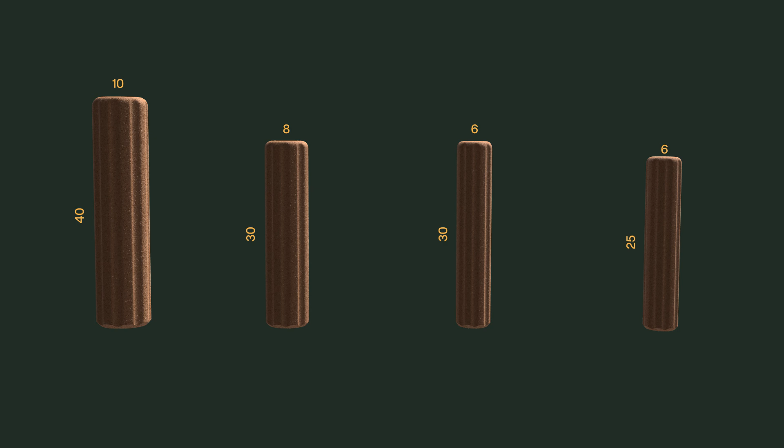In this video, I will demonstrate how to create a smart hardware type component that uses Autodesk Fusion configurations together with JoinerCAD Smart Hardware features. For simplicity, we will use a basic component, a dowel pin. Its dimensions will be controlled using configurations, and for placement, we will use the template provided with the JoinerCAD installation.

It is important to note that configuration-based hardware is created in a single file and then inserted into another file that controls the placement logic of the component. I will start by creating the dowel pin. Since this component will be controlled using configurations, the first step is to create the parameters that will drive those configurations. I open the parameters dialog and define values for the dowel's length and diameter.

I also add two additional parameters, L1 and L2. These parameters define how the dowel length extends in each direction within the joint. They are not required for a functional component and are used here purely for learning and demonstration purposes.

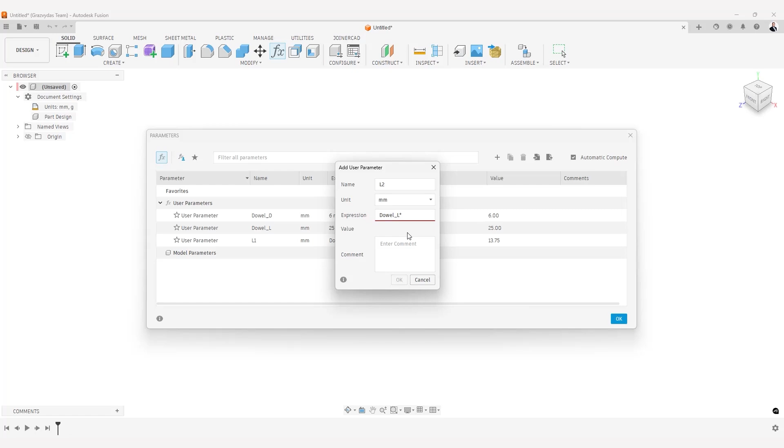Next, I create the dowel geometry. It is important to understand that this file will contain not only the dowel itself, but also the geometry of the hole that will be used for cutting. I model the dowel so that its shape and proportions are as close as possible to a real-world component.

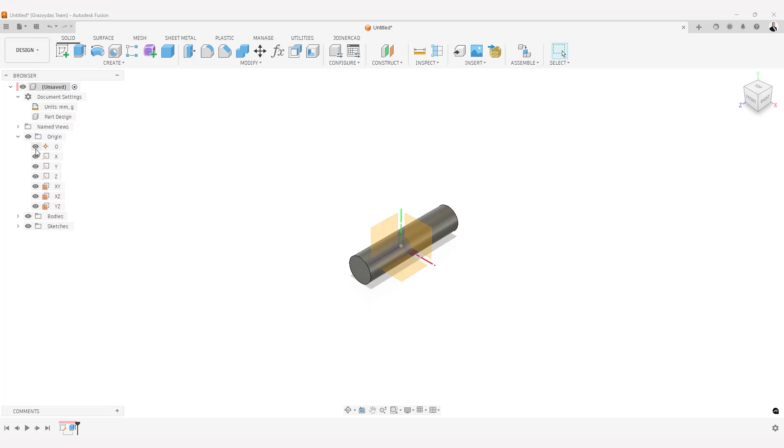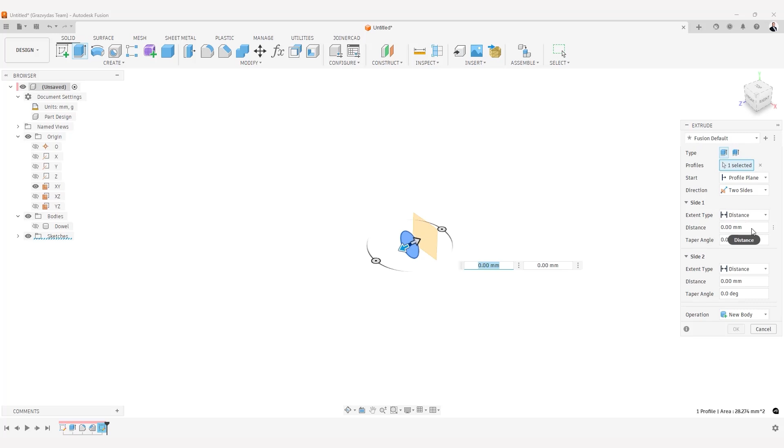Now, I create a new solid body that will be used to cut the holes in the panels. This geometry is created on the same XY plane and uses the same parameters as the dowel itself. However, I add an extra 5 mm so that the hole in one of the panels will be slightly deeper. Please note that when using the extrude command, I select the operation type New Body, which creates a separate solid body.

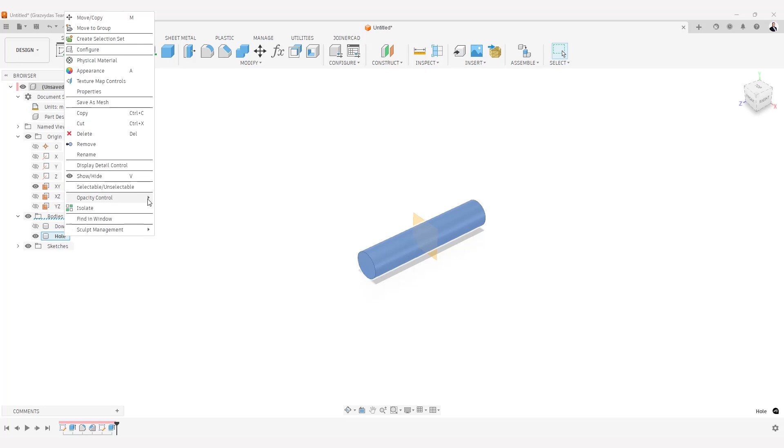For better visual clarity, I adjust the transparency of the bodies and apply a pine appearance. As mentioned earlier, I now set the sculpt type for each solid body. The dowel itself is set to neutral, so it will be ignored during the sculpt operation and will not be affected. The hole body is set to subtractive, meaning it will be used to cut material.

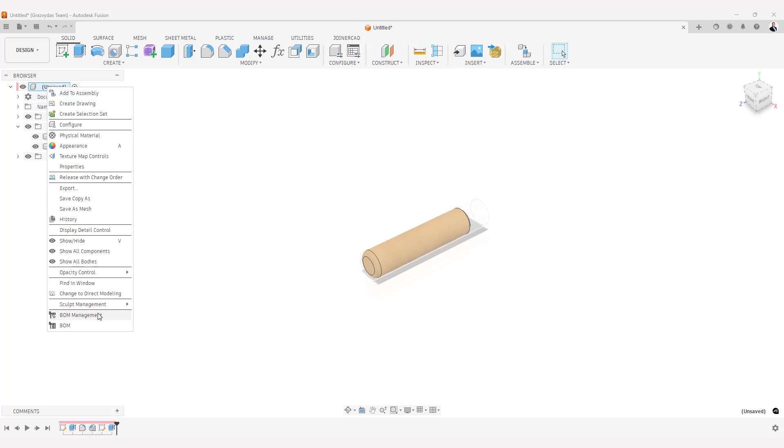I change the root component BOM type to quantitative so that the dowel is properly counted in the BOM. After that, I save the file. Next, I create the configurations that will allow the dowel dimensions to change. I open the display configuration table and define 4 different configurations.

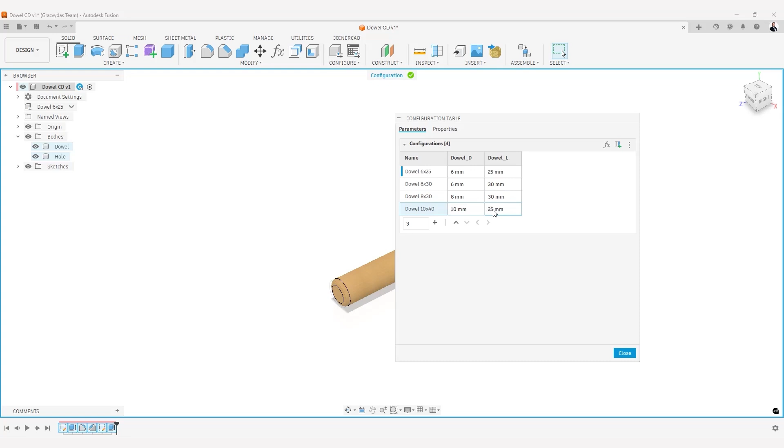After clicking Add Parameters, I select the parameters from the parameter table that I want to control and assign appropriate values for each configuration. I also update the part number for each configuration. These values will later appear in the BOM. Once this is done, I save the file again.

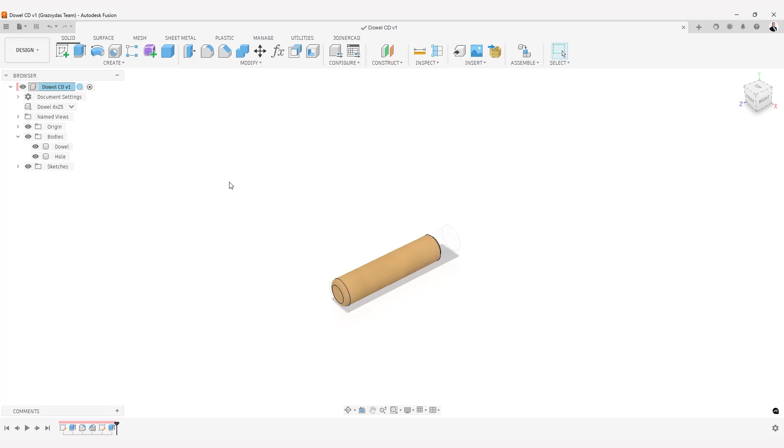As you can see, all configurations are now available. When I switch between them, the dowel dimensions update automatically. And the part number changes accordingly. To control the number and placement of dowels, I use an existing template that is provided with our library files. I copy this template and rename it for my project.

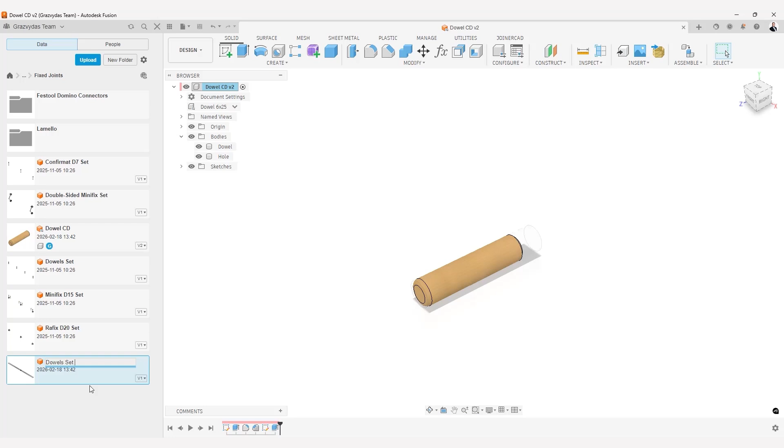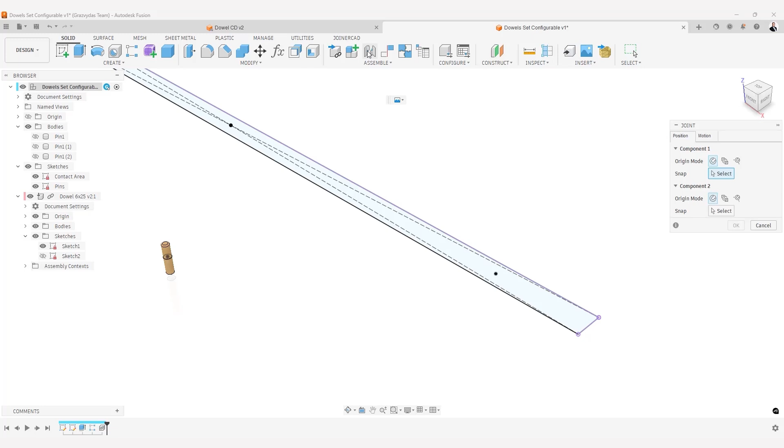After opening the template file, I insert the dowel file into it. To keep the workspace clean and easy to understand, I hide unnecessary components and enable the sketch that defines the dowel insertion centers. Using the joint command, I attach the dowel to one of the sketch centers.

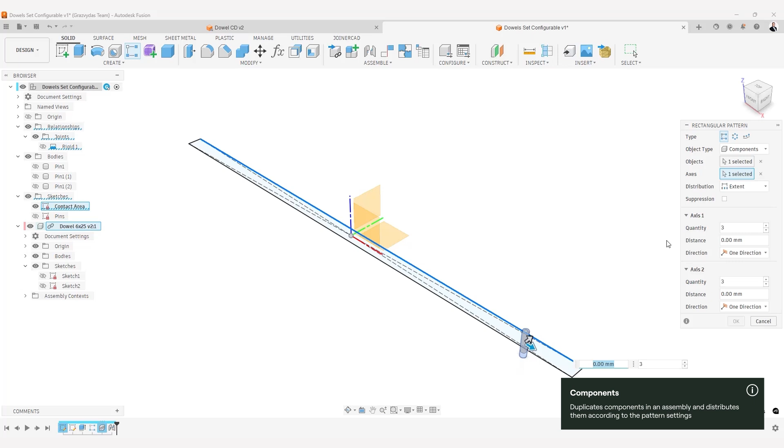I then use the pattern command to duplicate the dowels. I specify that the pattern operates on components, set the distribution to spacing, and define both the quantity and distance using parameters already stored in the template. These values can be changed at any time through the Parameters dialog.

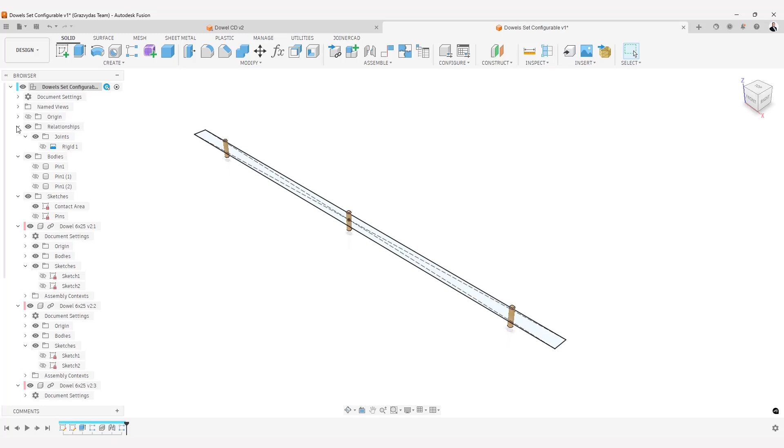I change the root document BOM type to transparent. This ensures that the assembly itself is ignored in the BOM, and only the dowels inside it are listed with a quantitative status. I verify that all required parameters are correctly mapped and confirm that there are no errors.

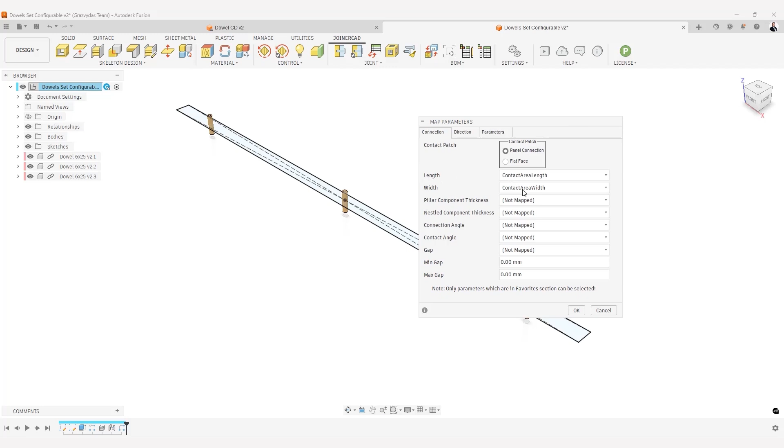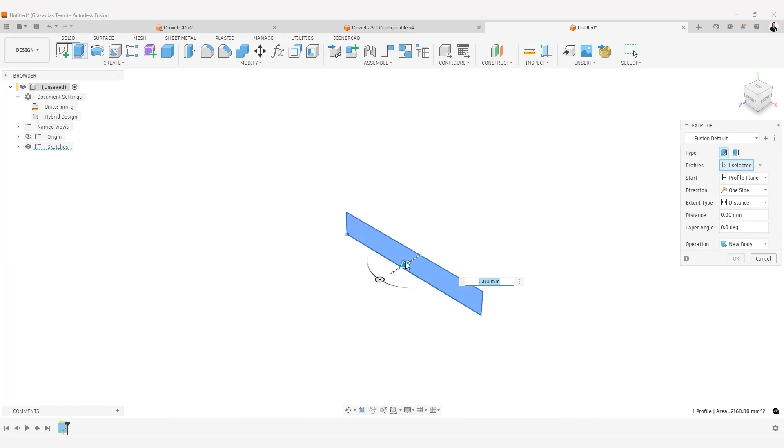For testing, I am going to create a joint consisting of two panels. Please note that I select the hybrid environment, where all JoinerCAD tools are available. Starting from JoinerCAD version 3.2.0, we support the new Autodesk Fusion intent-driven design environments, where JoinerCAD commands are automatically enabled or disabled based on context. The hybrid environment allows all commands to be used, which makes it ideal for testing and demonstrations.

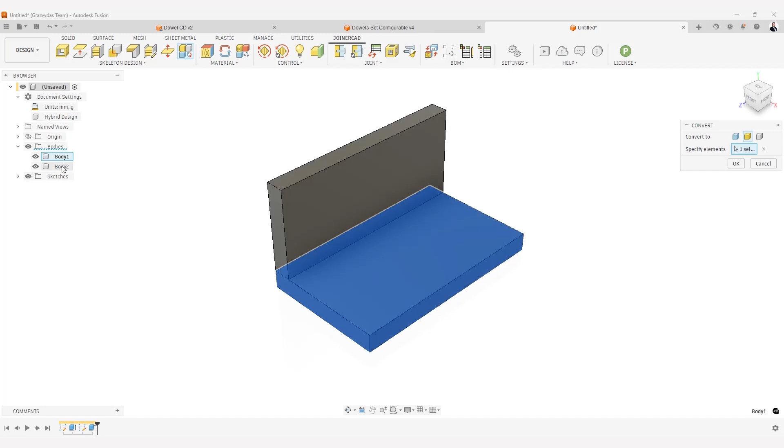Using the convert function, I convert the solid bodies into panels and save the file. Without this step, the created dowel cannot be inserted. Using the hardware attachment command, I attempt to insert the dowel. During insertion, a drop-down menu appears, allowing me to select the desired dowel configuration.

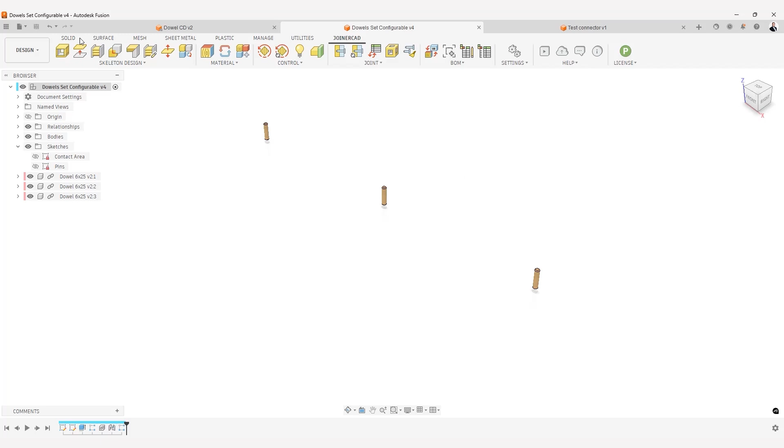After insertion, an error occurs. The dowel is placed incorrectly. This happens because I did not use the rigid group command when creating the hardware. I delete the dowel and return to the hardware file to create a rigid group. Rigid group is essential to ensure that all parts of the component remain in the correct position after placement. This is a very common mistake, which is why I wanted to demonstrate it here.

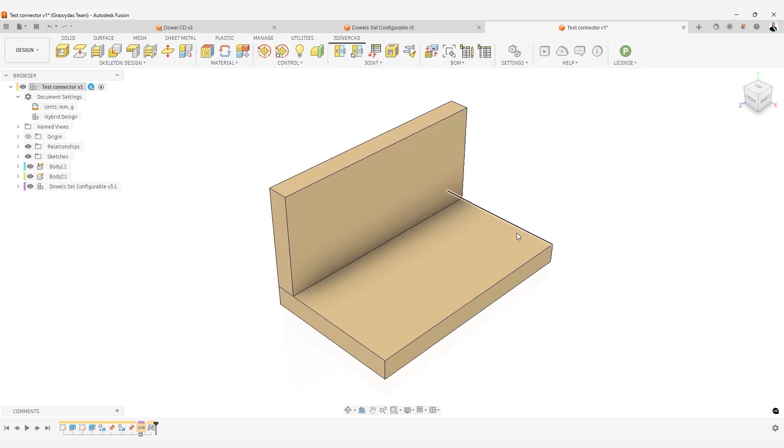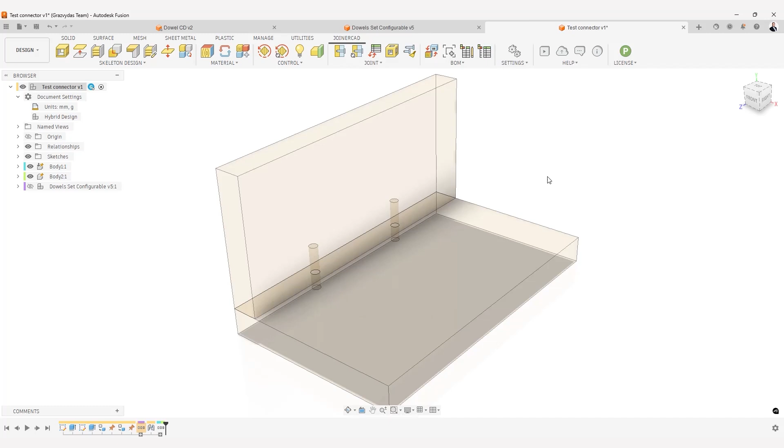I insert the dowel again. This time it is placed correctly. I perform the sculpt operation and confirm that the holes are cut correctly. Finally, I generate the BOM and verify that the quantities and part numbers are transferred correctly. The work is complete. We have created a configuration-driven dowel that cuts holes correctly and passes accurate data to the BOM.